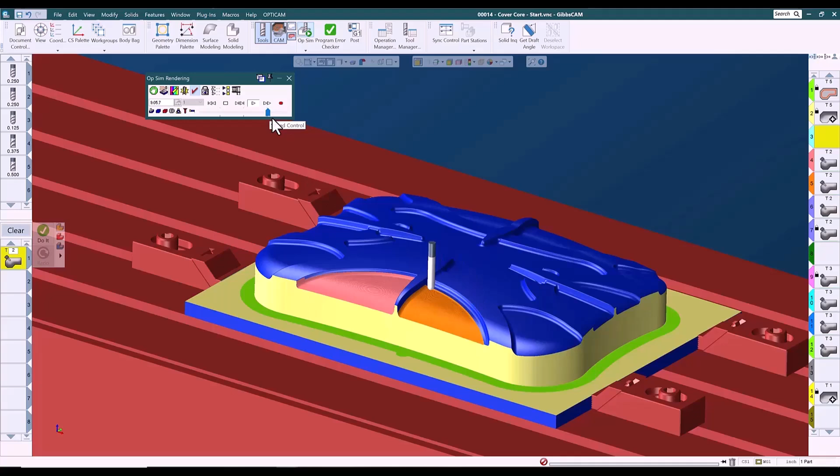There are three primary toolpath choices. The toolpaths are simple and straightforward and don't require a lot of input from the user. But in situations where they're appropriate, the surface processes are hard to beat as far as the simplicity of setting them up and the speed with which the toolpath is calculated.

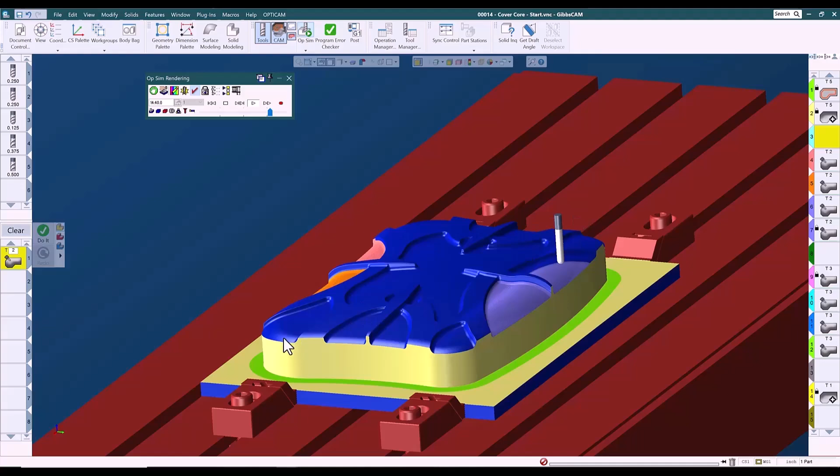Advanced 3D processes offer us more than a dozen additional toolpaths, most of which can be used for finishing. The advanced 3D toolpaths not only give us more toolpath types and patterns to work with, they give us significantly more control over the details of how those toolpaths behave.

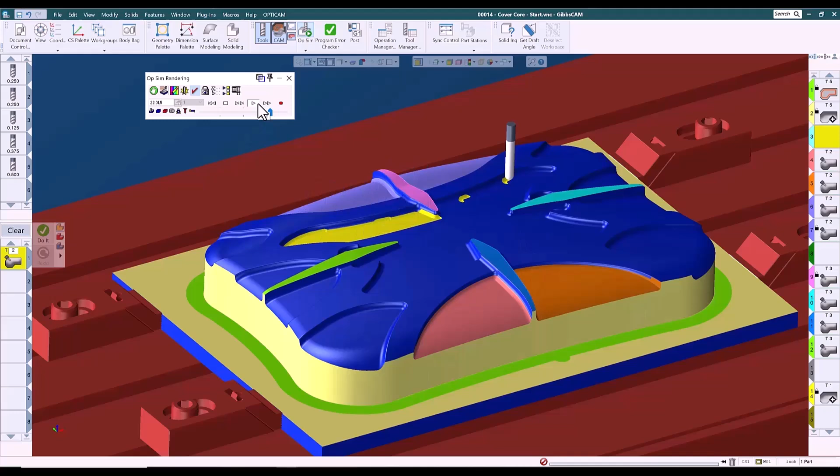5-axis or multi-axis process toolpaths offer us a vast array of additional toolpath styles and patterns, which, though marketed for 5-axis, can output 3, 4, or 5-axis toolpaths and provide options and controls to precisely control all aspects of the toolpath. Additionally, the multi-axis module provides the ability to calculate various toolpaths based on different underlying technologies, such as a triangle mesh, which is the strategy most widely used in the industry since the toolpath is a little simpler to calculate and it calculates a little more quickly. But toolpath can also be calculated based on the actual surfaces or based on a geodesic mesh, which tends to produce a smoother, more consistent toolpath.

In order to show you the things that I need to show you in a reasonable amount of time, and to keep this presentation at least a little bit more interesting, I've built the toolpaths on this part ahead of time. However, in the interest of transparency, especially for anyone who may not be familiar with the fluid drag and drop method in which toolpath is created in GibbsCAM, I want to take one of the more complex toolpath elements on this part and create toolpath absolutely from scratch. Let's machine this feature here.

And if I want to machine, I need a cutter. And I create a cutter simply by double-clicking on a tile on my tool list. I select the type of cutter. I'll take a ball mill, give it a diameter, 1/4 inch, make any adjustments I need to make to the length, and specify the number of flutes. I'll go with a 3 flute.

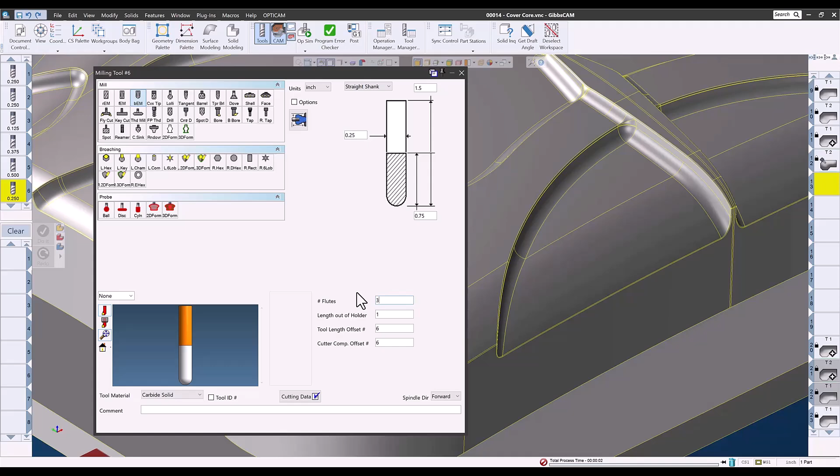Now the tools can be saved into a tool list, and I can load individual tools or an entire tool list with just a couple of mouse clicks. To create the toolpath, I take the tool and drag it down to my process dialog, or my process tile list, and then select the type of toolpath I want to create. I'm going to go with a 5-axis.

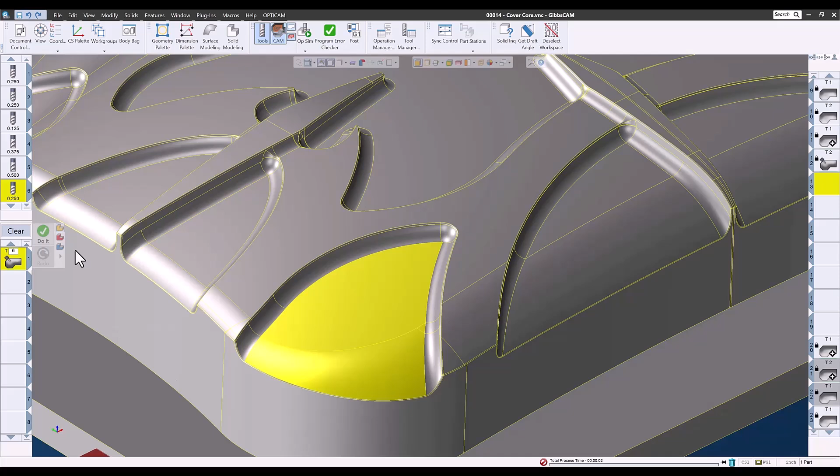And here I can restore defaults. I can go to my tool button and set my speeds and feeds that I've saved for this tool, and then go to the Surface Paths tab. On the Surface Paths tab, I'll select the type of toolpath I want to create. I'm going to create toolpath based on surfaces, and I'm going to select a parallel to curve or curves.

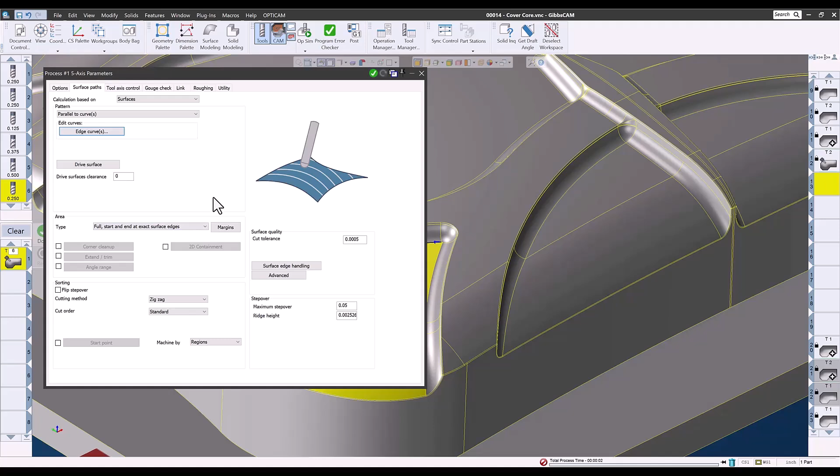I select the drive surfaces I want to machine, and my edge curves, the curves that I want the toolpath to be parallel to. I'm going to select these and click OK. And I'm going to adjust my step over to 20 thousandths and go to my tool axis control page and make sure that I'm outputting 3-axis toolpath. Once I have everything set the way that I want it, I hit Do It to create the toolpath.

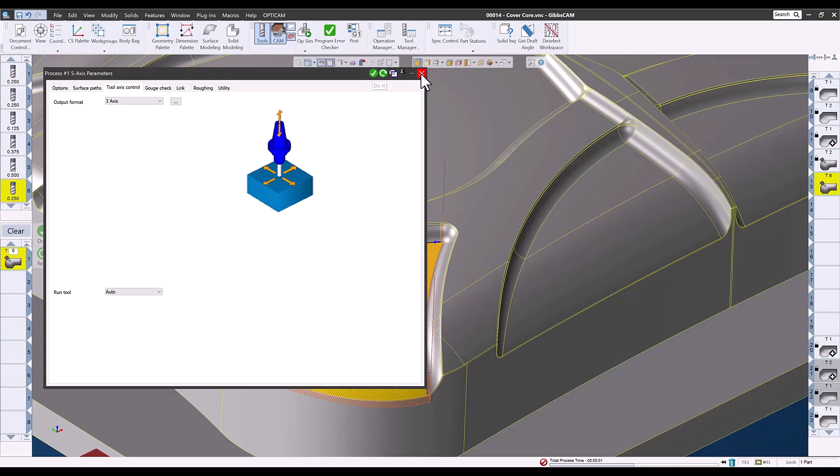Now if I want to create the same toolpath on other features, I could do that now. I can save this process if I like this and use it on other parts down the road, or I might want to machine multiple features with this same strategy. Maybe we want to machine this.

Load the process back up, go to Surface Paths, include that in our drive surface definition, and include this in our edge curves. Recalculate the toolpath, and we could do all of these pockets at one time.

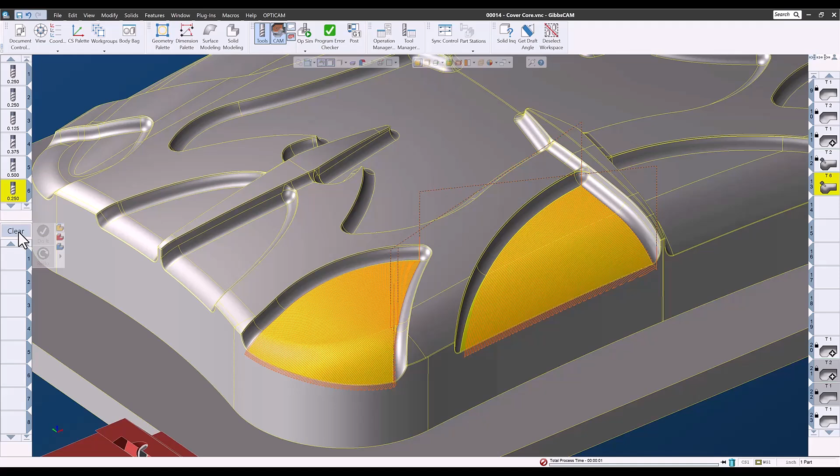At this point, I want to let you know that not all the toolpaths I'm going to show you are particularly good choices for the features that I have them machining. The point here is to show you that you don't have to settle when it comes to toolpath. You don't have to wish that you had more patterns to choose from.

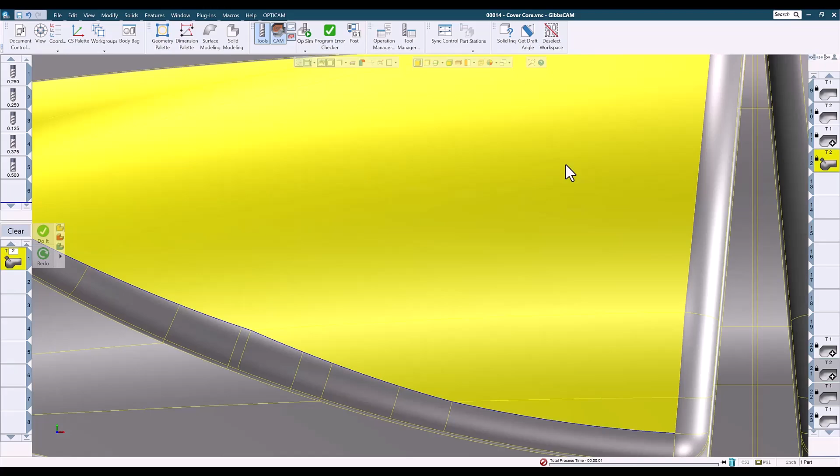GibbsCAM provides you with a wealth of toolpath patterns to choose from, with a huge variety of ways to define and control those toolpaths. Yet they're easy to set up and calculate quickly. They're easy to modify, and once perfected, can be saved for use on other projects. Let's take a look at some toolpath.

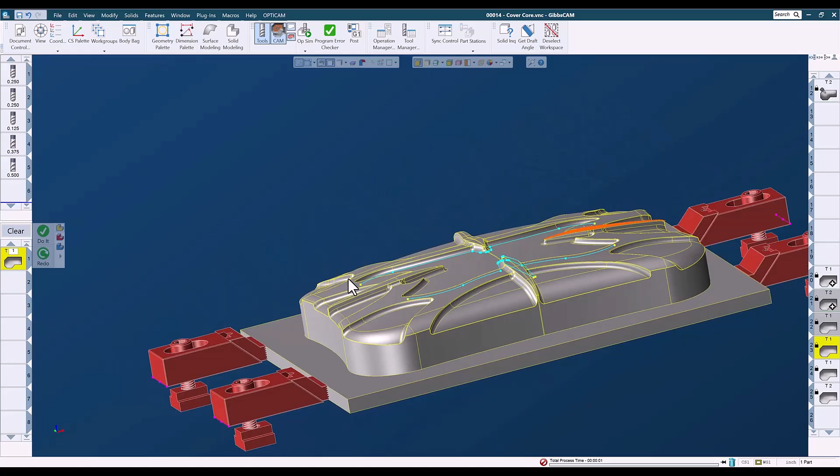Now, this part's not terribly complex, and in reality, you could machine most of this, if not all of it, with just some simple linear toolpaths, such as lace cut from the surface process. But more than likely, you'd want to machine different areas of this with different strategies, both to improve cycle times by minimizing retracts, as well as selecting toolpaths that better conform to the shape of the area being machined, both to even further reduce cycle time and to improve effective surface finishes.

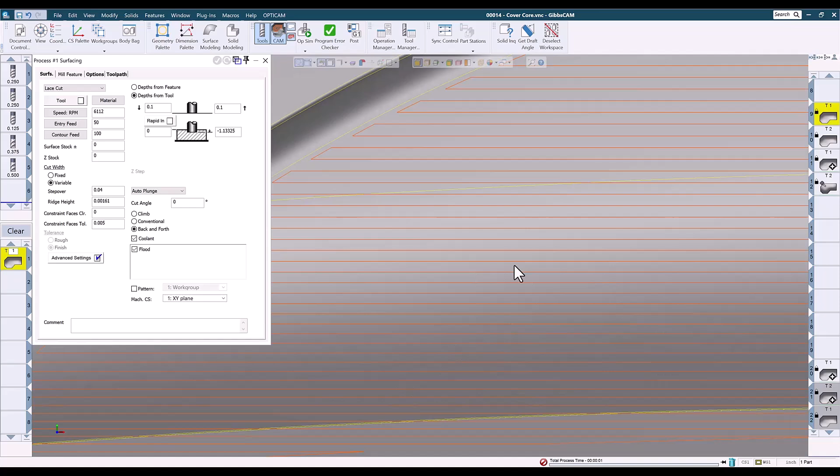This toolpath is from the surface process, and it's a simple surface lace cut toolpath. This creates a linear pattern at a designated angle to machine the selected face or faces. Lace cut is the surfacing toolpath with the most options and controls. It's also the only one that's designed to be used either for finishing or roughing. Lace cut is a true multi-face toolpath and can be set up very quickly.

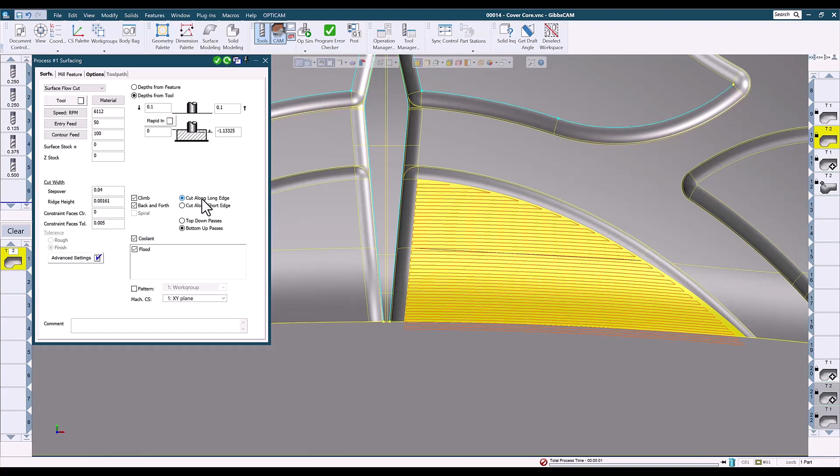This toolpath is also from the surface process, and it's a surface flow cut, which is a single surface toolpath that's controlled by the ISO curves of the surface. This toolpath will automatically run parallel to either the U curve, which would be considered the short side, or parallel to the V curve, which would be considered the long side. With a couple of exceptions, it's not ideal for multiple faces since it will machine each face separately, but it's often hard to beat when you need just a quick toolpath to finish a single surface quickly and easily.

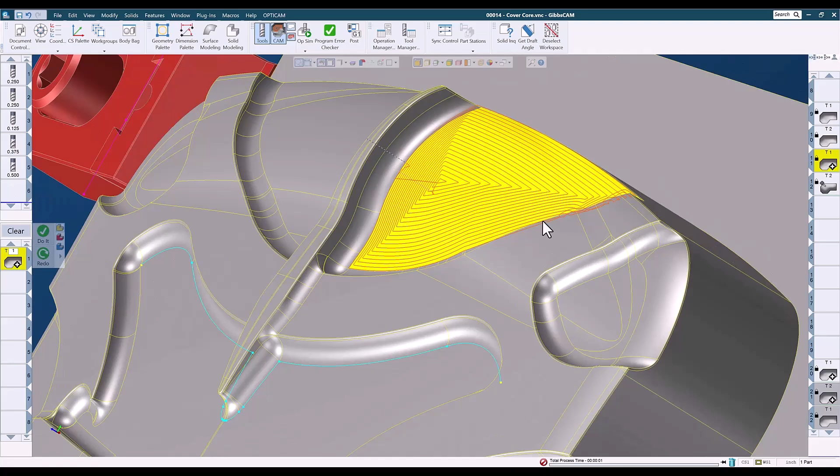On this toolpath, we're using the Advanced 3D Constant Step Over pattern. This toolpath is created by offsetting the boundary of the cut in a constant offset and maintaining the ridge height regardless of the surface angles.

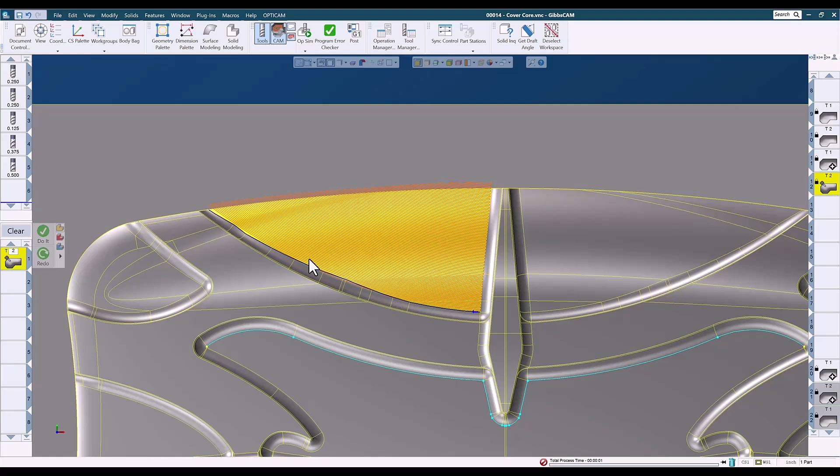This last one is from the multi-axis process, and the pattern is parallel to curve or curves. This toolpath allows us to select one or more faces that we want to machine and curves that the toolpath will then run parallel to. Let's take a look and see how those look running.

So we have the front two running different variations of a straight linear toolpath, and the back right an offset of the boundary of the faces. And then this one is running parallel to, in this case, just a single edge.

Let's take a minute to focus on the center section now. This is an example of an area where the simple surface lace cut really isn't very well suited, and why it's important to have a very broad suite of toolpath choices at your fingertips.

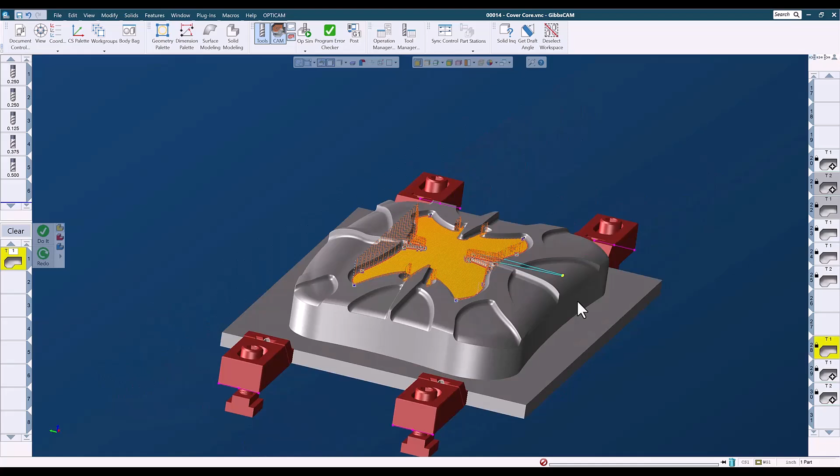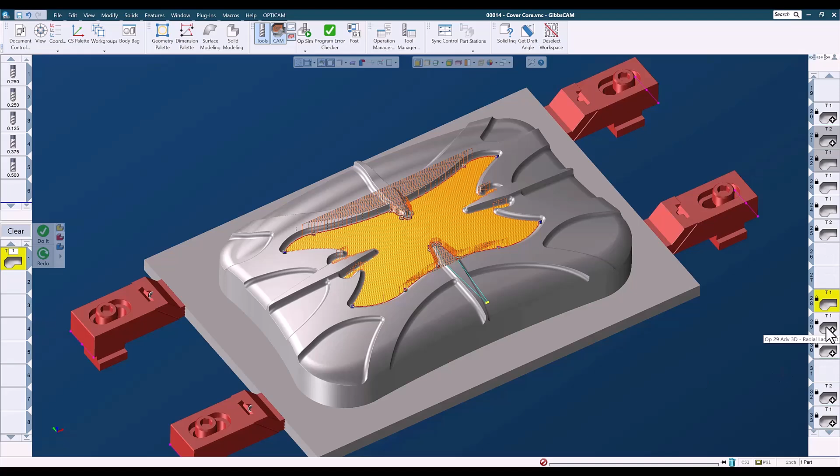This toolpath is doing exactly what we asked, but due to the irregularities of the shape, this toolpath has to retract frequently to jump over areas that aren't part of the cut, but that are in line with the linear strokes of the toolpath. So while a linear lace cut is entirely appropriate for this toolpath, it's not one that we would choose for this toolpath. Let's look at a few toolpath choices that might do a better job for us on this.

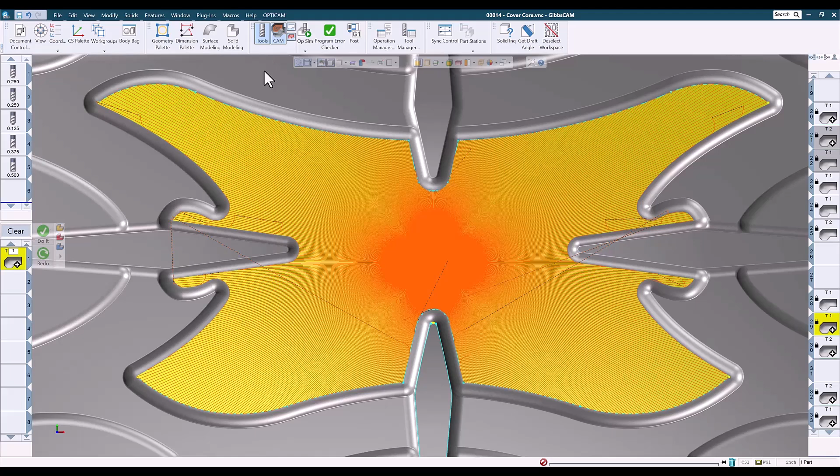Now this one's an interesting option. This is an advanced 3D lace cut using the radial mode, which works in a fan shape from a defined center point. Since almost the entire feature here can be reached in unbroken lines from the center of the pocket, this toolpath works, and works quite well.

However, since in this case the center point is located within the area being machined, the toolpath gets really dense toward the center point. So we end up with most of our toolpath with a much finer step over than what we specified, meaning the toolpath has more length. There's more toolpath required to finish this area.

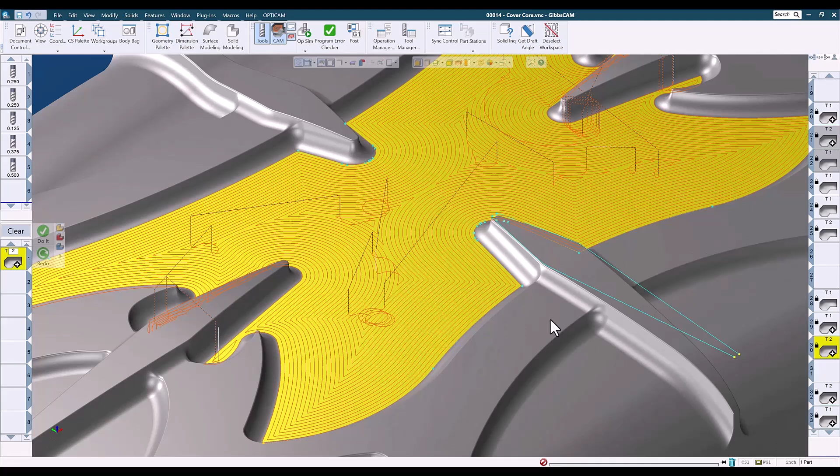Now, using an advanced 3D constant step over toolpath, we achieve some very good toolpath. This one has a few retracts due to the way that offsetting of the boundary creates isolated areas as the offsets get separated from the rest of the shape. But this toolpath does a good job of following the shape of the area being cut. And with a finer step over, this would produce a very good finish in this area. This toolpath is less than a third of the length of the radial lace cut that we just looked at.

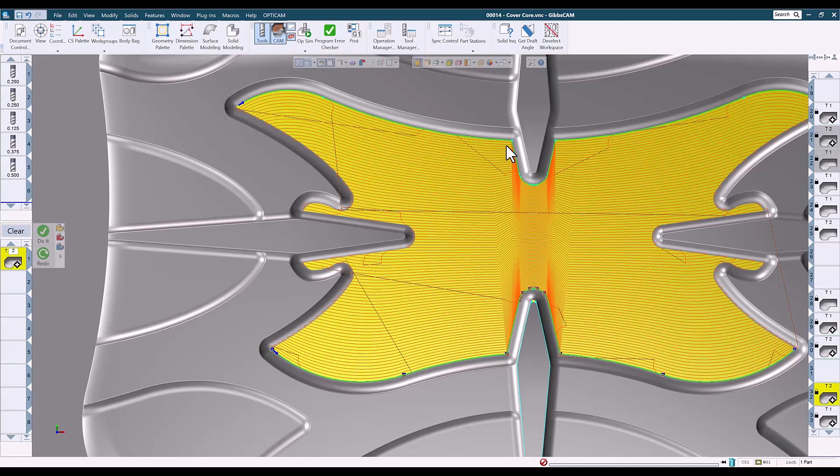Here's an advanced 3D 2-curve flow, where the toolpath is morphing from the upper shape to the lower shape as it crosses the cut area. Now this is a very usable option and is getting close to what I would be looking for. But with this shape, as the drive curves change direction and head more toward the opposite drive curve, the toolpath gets really dense, which is less efficient and really not what I'm looking for. But this one only misses the constant step over by about 35 seconds in runtime. So it's still pretty efficient.

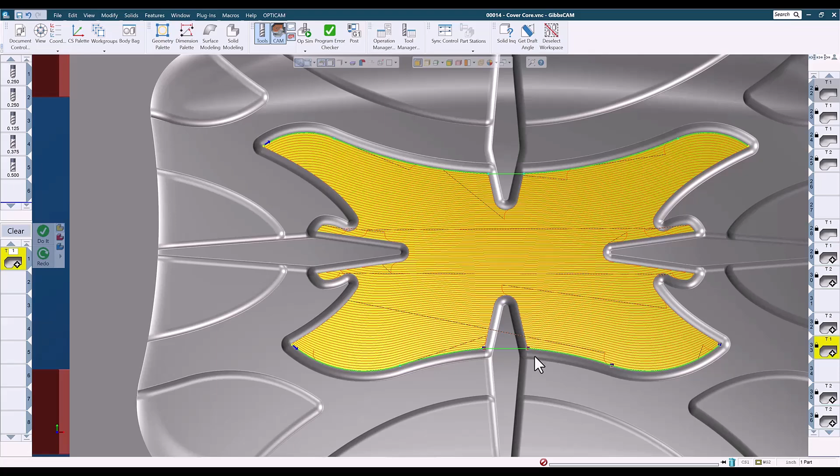But if we stick with the 2-curve flow but slightly modify the drive curves, we can get this instead. This choice has the fewest retracts and is the fastest running of any of these choices.

Now I do want to point out that there's nothing wrong with what I used to call playing what-if games. You can try multiple toolpath options in different areas very quickly and easily and kind of see what the effect is on your runtime. I used to do that frequently when I programmed every day.

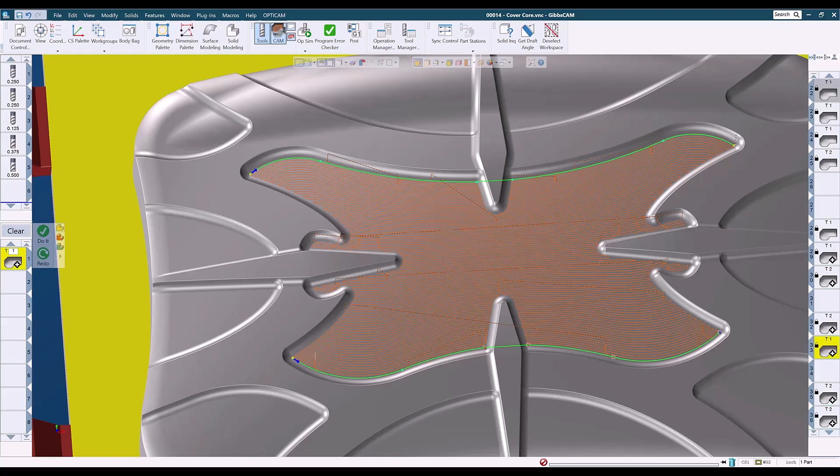Moving on to some of the other features, this is an advanced 3D spiral lace cut. By defining the center of this arc as the center of the spiral, limiting the tool to the silhouette of the surfaces, and running the tool back and forth, we get a really nice toolpath that somewhat flows with the shape and has minimal retracts.

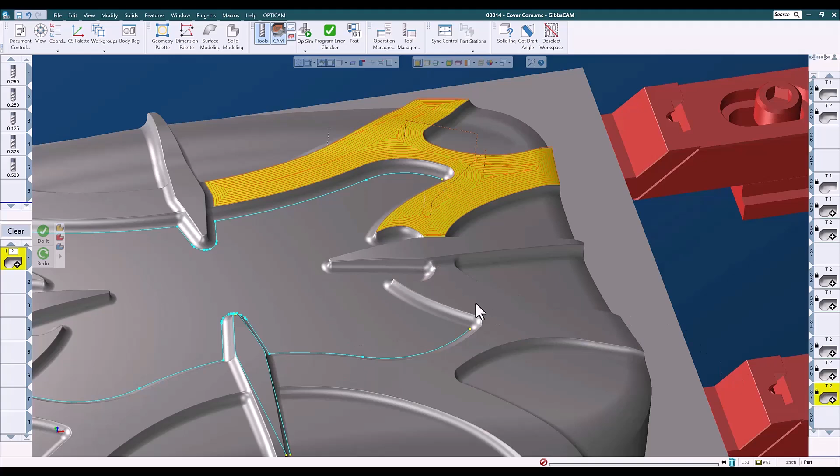Here's an advanced 3D constant step over pattern. This flows perfectly with the area to be cut and only has 2 retracts. This would work very nicely for this shape. And while we're looking at these, let's check out a few of the multi-axis or the 5-axis options for these features. Of course, all of these are set to output 3-axis toolpaths.

This is a multi-axis toolpath based on surfaces, and the pattern is a morph between 2 curves. This is a beautiful toolpath that morphs from one edge to the opposite edge and gives me complete control over retracts.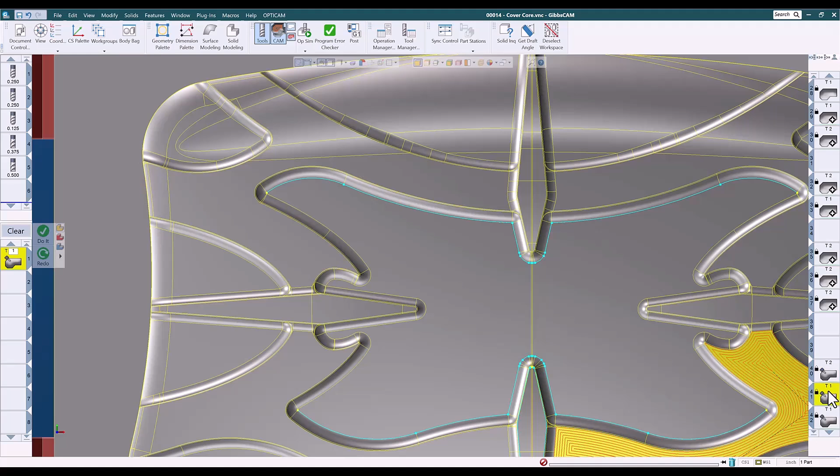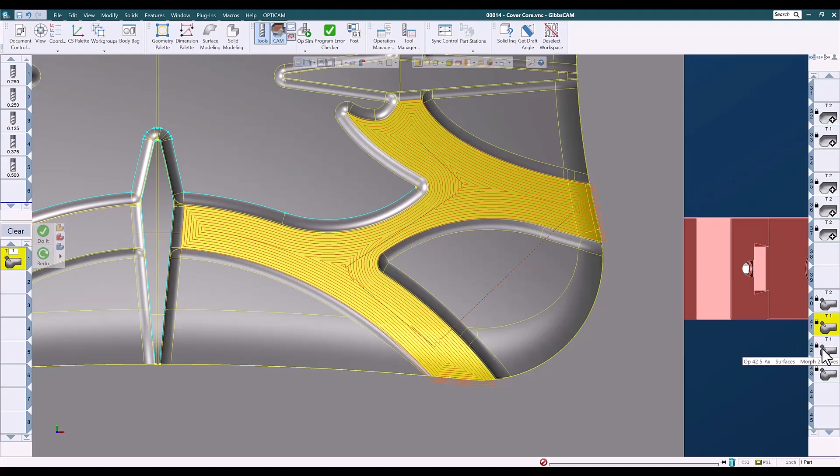This is a multi-axis in geodesic mode, and the pattern is parallel to multiple curves with automatic detection of curves and default settings. So with automatic detection of curves, I don't have to define the curves. It selects them based on the surfaces being cut. This is going to be very similar, in this case, to a constant stepover from the advanced 3D, but probably with a little bit better retract control.

And this was just another multi-axis morphing toolpath. And then we get to this one. This is the multi-axis toolpath geodesic, based on a geodesic mesh. And it's using the morph between 2 curves pattern. It's similar to the other morph between 2 curves, but this is the geodesic version. This produces an incredibly nice toolpath for this shape that has no retracts and conforms to the area very well. This would probably be my choice for this area.

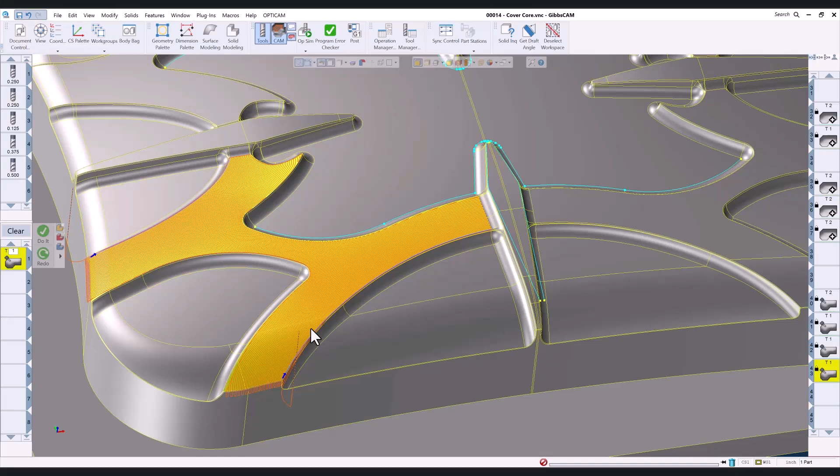Let's see what some of the toolpaths that I said I preferred look like in place with more realistic stepovers. My preferences are largely driven by a desire for few, if any, retracts, and a toolpath that, to my mind, flows with the major curves of the shape being cut.

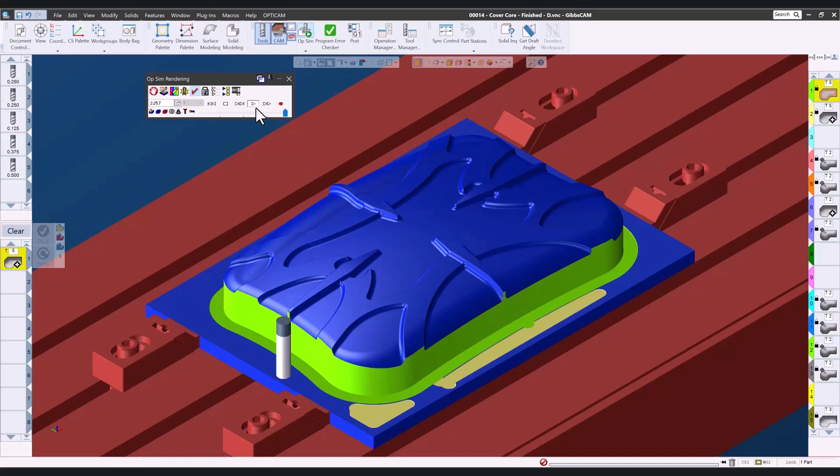I started out finishing the outside vertical walls of the core with just a basic contour with Z-ramp turned on so it ramps down, and then following that up with an advanced 3D flats cut on the flange. Notice that the flats cut is avoiding the fixtures. This is a setting in the dialog, and you can specify how much distance there will be between the cutter and any fixture.

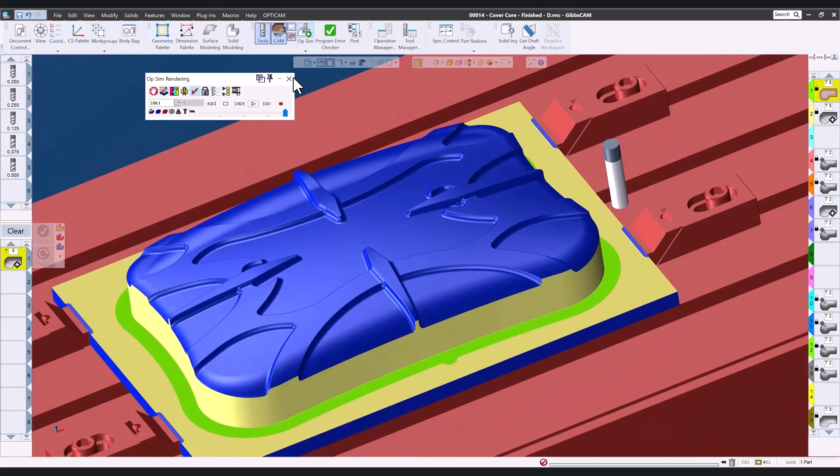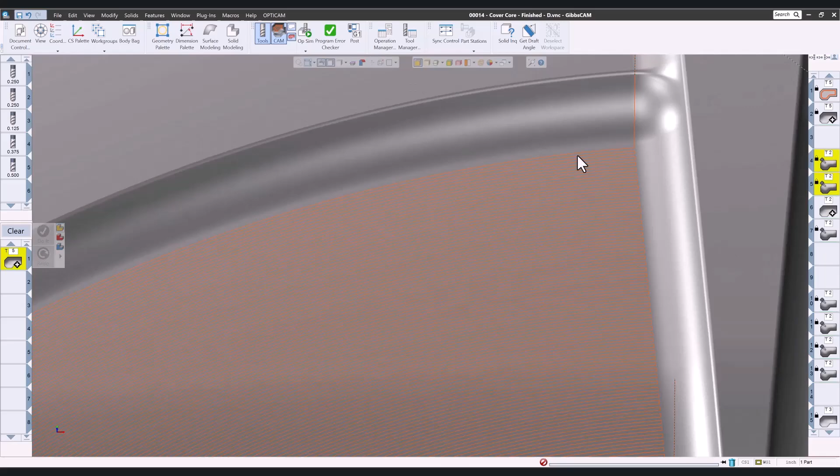Looking at the pocket on the front and on the back side, I started out with a multi-axis based on surfaces and selected a parallel to curves for the 2 pockets in the front. The difference is for the first pocket, I only selected the back radius as the edge curve, and the toolpath looks like this. For the other pocket on the front, I simply added the side curve to the edge curve definition, and as a result, the toolpath starts here rather than over here and works toward both these walls at the same time.

We'll take a look at those 2 running. You can see that this toolpath is running parallel to only the back curve, while this one is running parallel to both the back curve and the side curve.

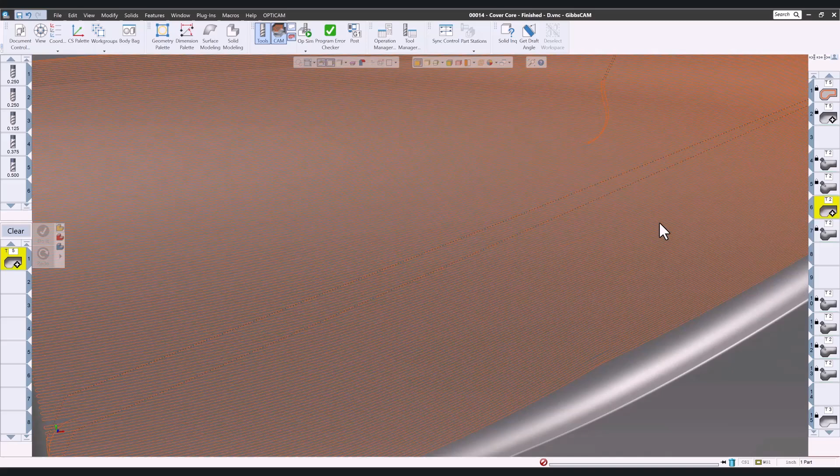For this one on the back side, I chose an advanced 3D curve flow. I extracted edges from the model and adjusted them slightly and ended up with this. This looks good, except to me the toolpath gets a little too dense for my taste over in this area. Now we could modify the curves and get most of that out, but just taking one shot at this is what I ended up with.

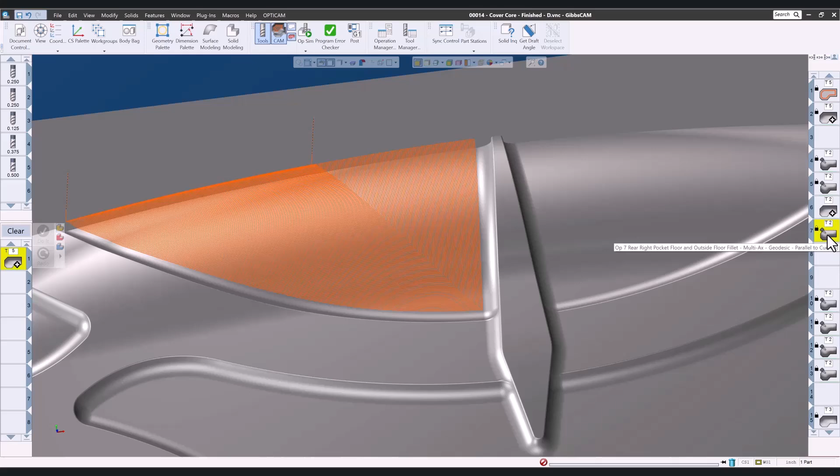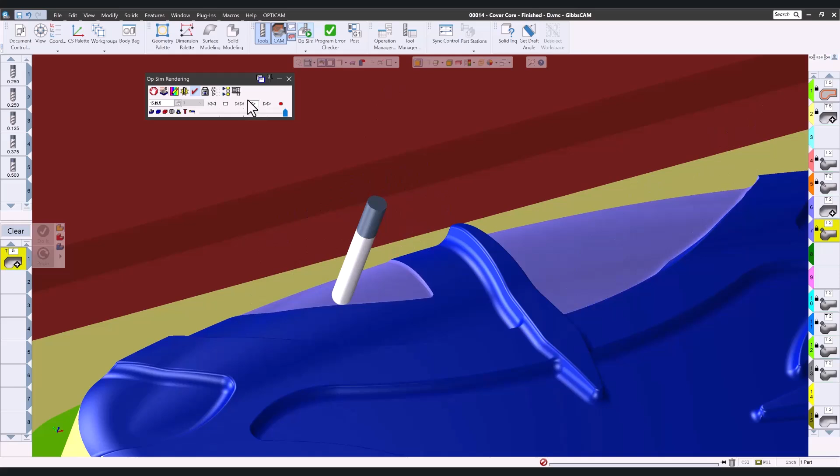For the one on the back right, I selected the parallel to curves based on a geodesic mesh. The same logic as the first 2, but based on a geodesic mesh rather than surfaces. You can see how smooth and consistent this toolpath is. And let's see those 2 running. This one is running nicely, but you can see that every stroke goes to that back right corner, making the toolpath much more dense in that area, while this one is conforming to the closed sides of the pocket and every stepover is consistent.

All right, for these H-shaped bosses, I selected morph between 2 curves for all 4 of these, but for the front 2, I used the option from the multi-axis geodesic toolpath. You can see there are few, if any, retracts. And for the back two, I used the option from the multi-axis surface-based toolpaths. These have a few extra retracts, but most of those could be tuned out with a few seconds on the linking tab. But I'm showing the toolpath with largely the default settings.

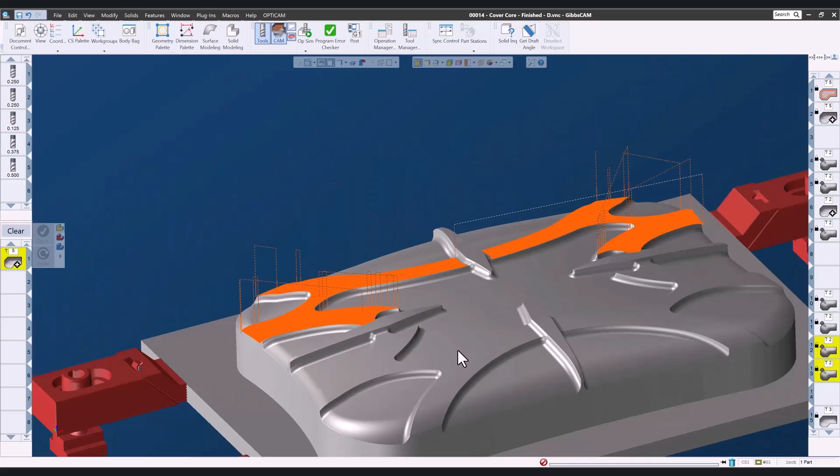And this is what they look like running. Each of these toolpaths is morphing from the long side to the short side, the geodesic toolpaths in the front and the surface-based toolpaths in the back. The geodesic patterns do make a cut to the outside of the short side before finishing so that the tool is climb milling at that edge rather than pushing the chip or burr to the outside.

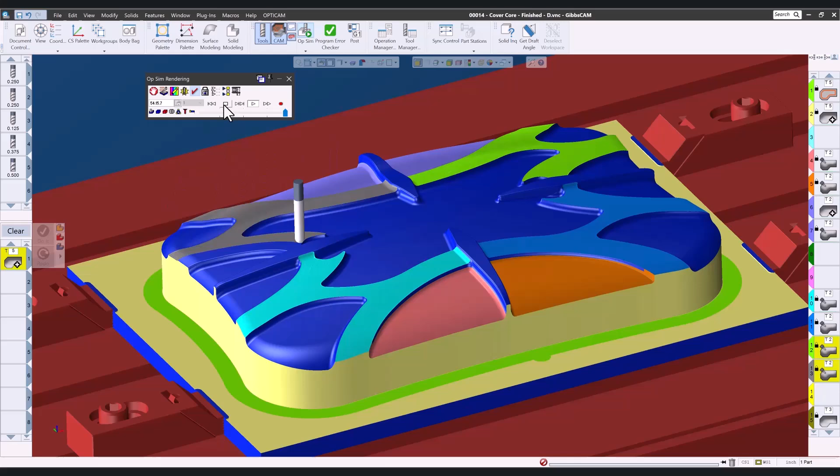And in the back, you see that functionally a very similar toolpath is produced by the calculations based on surfaces with the morph between two curves pattern. And with either, by setting appropriate cutting tolerances and stepovers, fitting arcs where appropriate, you can easily achieve the surface finishes your customers are looking for or produce a part that requires minimal polishing if that's the finish that you need.

Moving on, for the 4 diamond-shaped bosses, I used a 2-curve flow from the multi-surface process for this one.

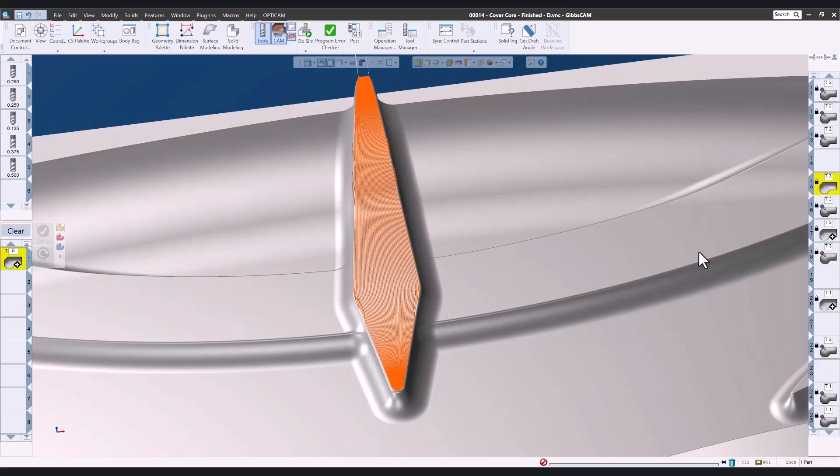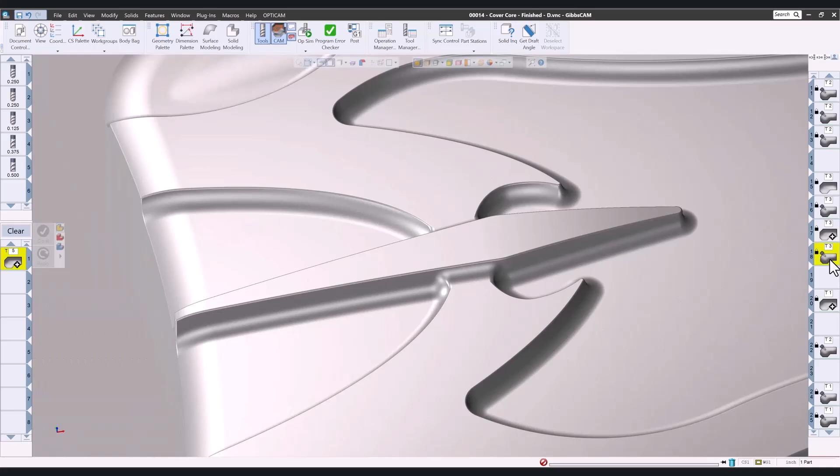I used a multi-axis based on surfaces morphed between 2 curves for this one. I used an advanced 3D 2-curve flow for this one. And back to the multi-axis option for a geodesic-based morph between 2 curves for this one.

You can see that all these options produce similar toolpath, but with varying numbers of retracts, although none of them have more than just a small handful. But they all start with one shape at one edge and morph as they move across the surface to the other edge.

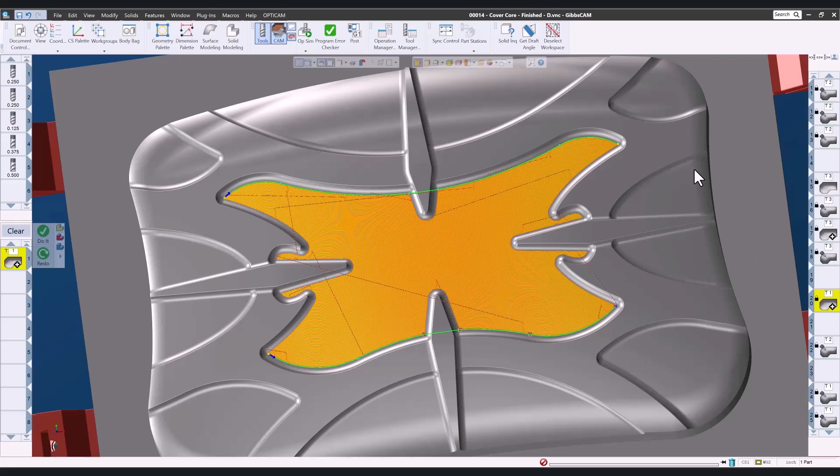For this center section, I went back with the advanced 3D 2-curve flow using that modified geometry. And then for the 8 pockets on the ends, I used the parallel to curve from the multi-axis toolpath based on surfaces toolpaths.

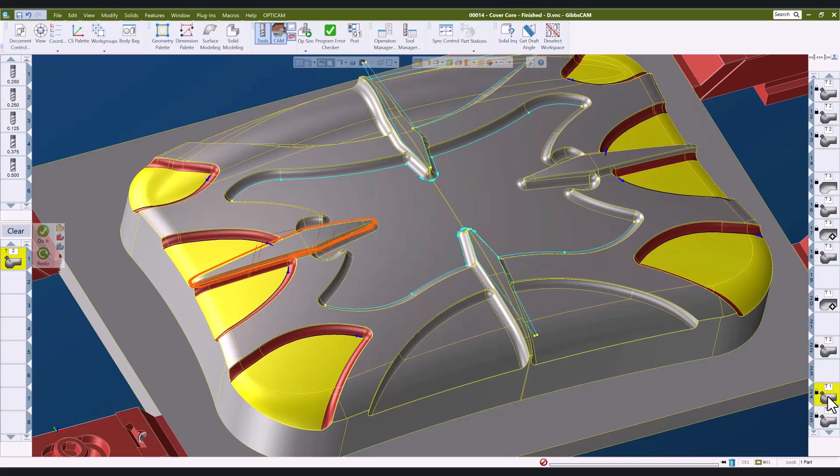And then I came back and added some toolpath for the blends on top of the bosses. Added toolpath to finish the floor-to-wall fillets. And if I hadn't finished these with the floors, I would come back and take care of these fillets. Now let's quickly run through the rest of this toolpath graphically.

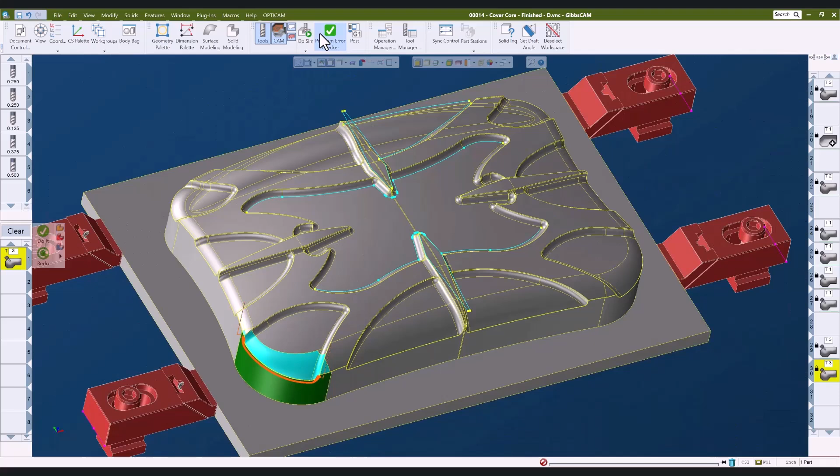For this sample toolpath, we've used patterns from all 3 of the 3D modules: surface processes, advanced 3D processes, and multi-axis processes. Hopefully, I'm demonstrating that there are a huge number of toolpath choices in GibbsCAM for 3D finishing, and usually far more than one way to approach creating toolpath in a particular situation. Yet, these toolpaths are simple to set up, quick to calculate, and have the power to machine your parts your way.

Now, once we've developed toolpaths, especially if they're well suited to the parts we commonly manufacture, it can be really helpful to save the processes. Let me load this one up again. This is an advanced 3D N-Curve flow using a 1/4-inch ball mill and with a step over of 20 thousandths.

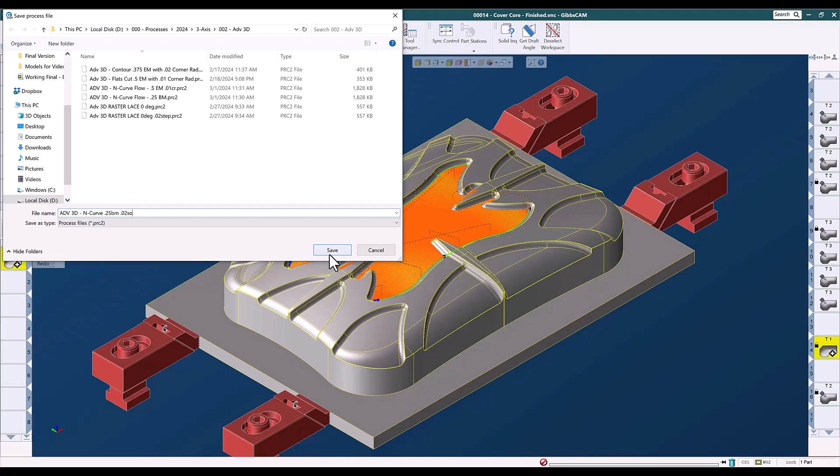If I think this did a really good job on this part, and I'm likely to use this strategy with the same tool on something else, I might want to save the process. Then I can call it up anytime I need it with just a couple of mouse clicks. I can simply right-click on the process, and this could be a multi-process for that matter, and save it to a folder and assign it a name that will allow me to know where to find it and know what it's going to do.

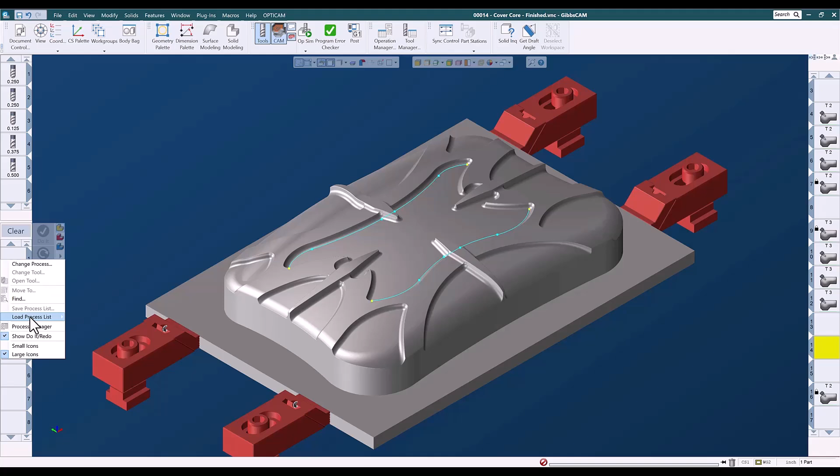If down the road I run into a situation where I think using an advanced 3D N-Curve flow toolpath with a 1/4-inch ball mill will help me, I simply right-click on a process tile, hover over Load Process List, and navigate to the process I want to use. I'll grab this 001 Advanced 3D N-Curve 1/4 inch ball mill with a 20 thousandths step over.

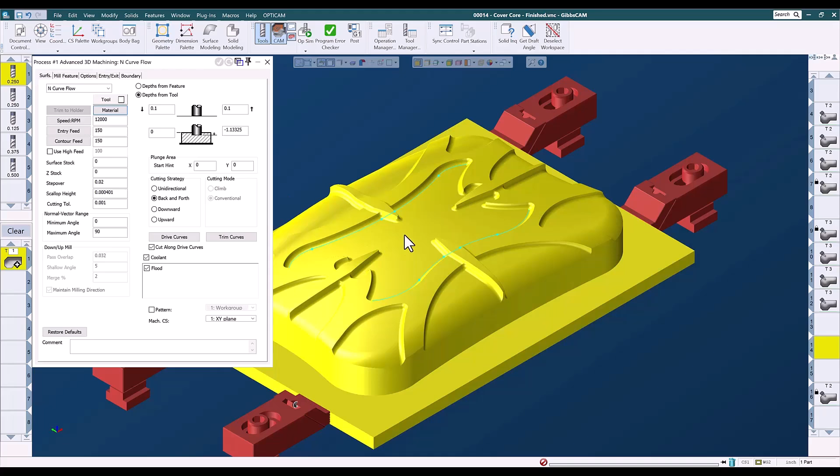I'll open up the process and select the surfaces that I want to machine. And then I'll define the drive curves that I want the toolpath to run parallel to. And then hit Do It.

These saved processes capture the settings for the tool use, speeds and feeds, depth of cut, really all the information about the toolpath except specifically what to cut. And if the tool is not already in your tool list, the process will build it automatically. Over time, saving and utilizing these processes can really streamline your programming, as well as standardizing many of your processes to provide a greater degree of consistency from one job to the next, or for that matter, from one programmer to the next.

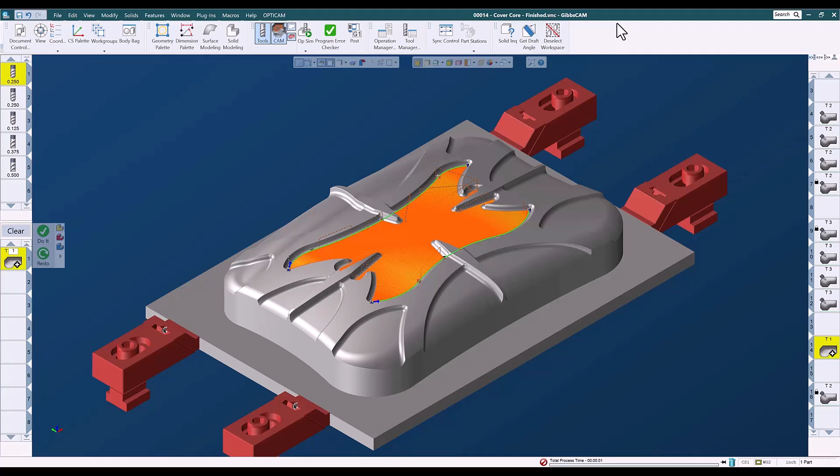I'd like you to see what using saved processes is like, so I'll program this part complete using saved processes. Here's the part that I had in my spare parts library, I call it. It's a 3D part. It is about 14 and a half inches long and 8 inches wide, a couple of inches thick. And the first thing that I like to do when I open up a model that I'm not terribly familiar with is to check it out a little bit.

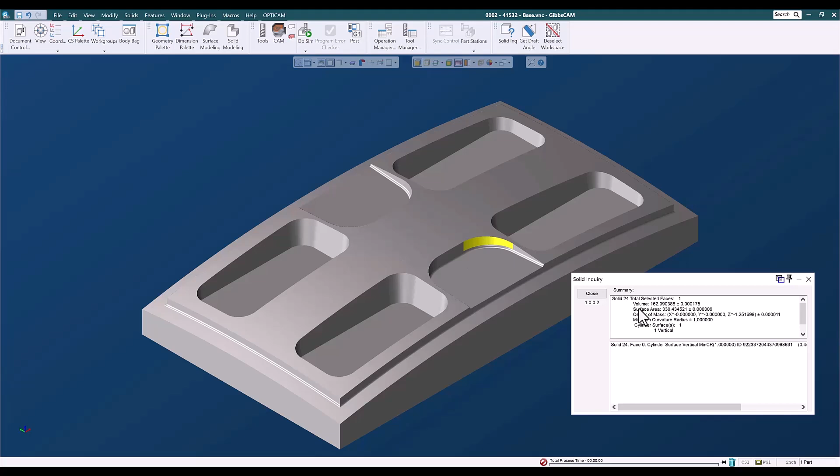And close that too soon. And I also usually check a few radiuses just to see what I'm dealing with. These are 1-inch radiuses, and these are .504 and some change radiuses.

All right, so I'm ready to start machining this. I'm going to open up my cutting tools and my CAM, and I'm going to load a tool list in here. So I'm going to right click, go to load tools, and load my 3D finishing tools. All right, so the first thing that I want to do is rough this.

So I'm going to right click, go to load process, 3-axis roughing, and load a VoluMill 3D toolpath using a 1/2 inch rougher with a .040 step up. The step up in VoluMill is what gives us definition to our 3D shape. It'll cut to the set depth per cut, but then when it hits the 3D surface, it'll just walk up that surface. It'll take passes higher and higher to give you a much closer to net shape cut.

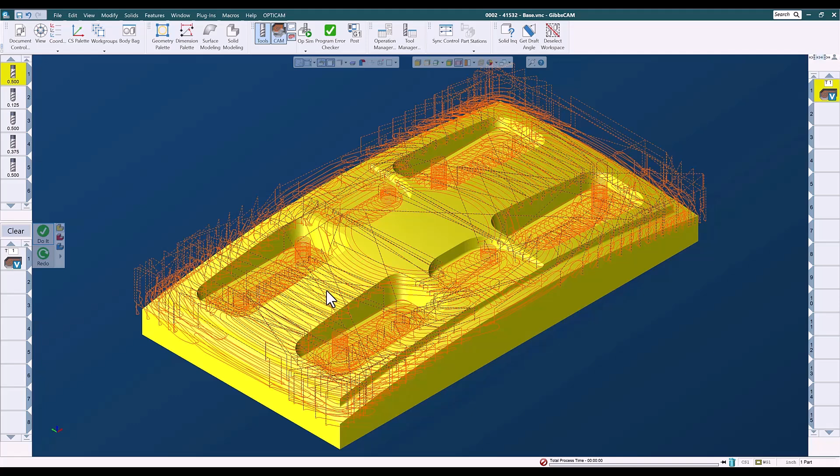All right, and there we go. You can see it's putting as much definition to the 3D shape as it can within the bounds of the .030 step-ups that I specified. All right, so I'm going to clear this out and decide what I want to do next. I think the next thing I'm going to deal with is going to be the 7.5 degree walls on these 4 pockets.

There are a few ways that I could approach that. The main thing that I want is minimal retracts, minimal times the tool pulls off the finished surface. So I want to start cutting this edge here and finish cutting this edge, but with a spiral down. So my passes are going to be closer together on the short side than on the long side. But let's see what we got.

So I'm going to right click, go to load process list, 3-axis, and I want to go to my 5-axis engine again and go to surfaces, and I'm going to select this morph between two surfaces rather than the two curves. We looked at the two curves earlier. Let's look at a morph between two surfaces. We'll open that up and look at our Surface Paths tab.

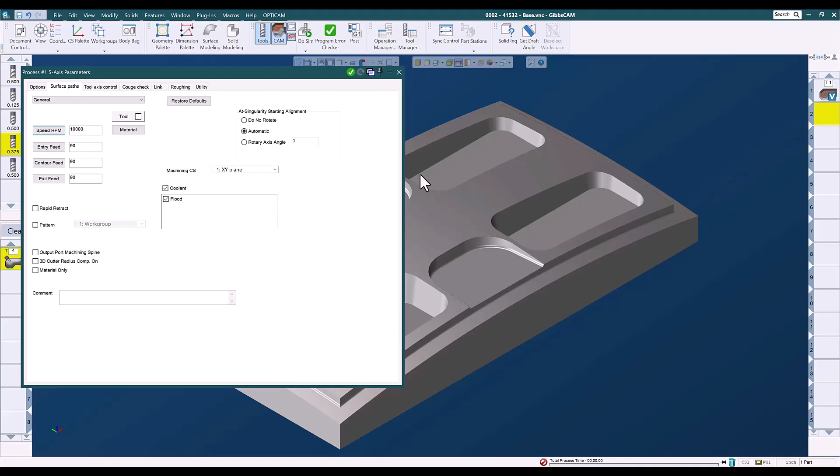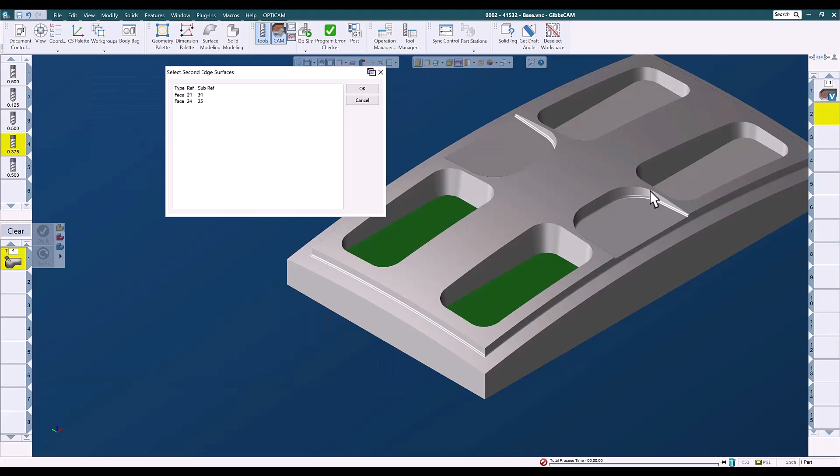And we need to define our drive surfaces. So I'm just going to run around and grab these real quick. And then I'm going to do my edge surfaces. My first is where the toolpath is going to begin, which will be here. So my toolpath is going to begin at the intersection of this blue surface, my first edge surface, and the yellow. The yellow is what's being machined. And then the second edge surface is where my toolpath is going to end. And it's going to be the floors of these pockets.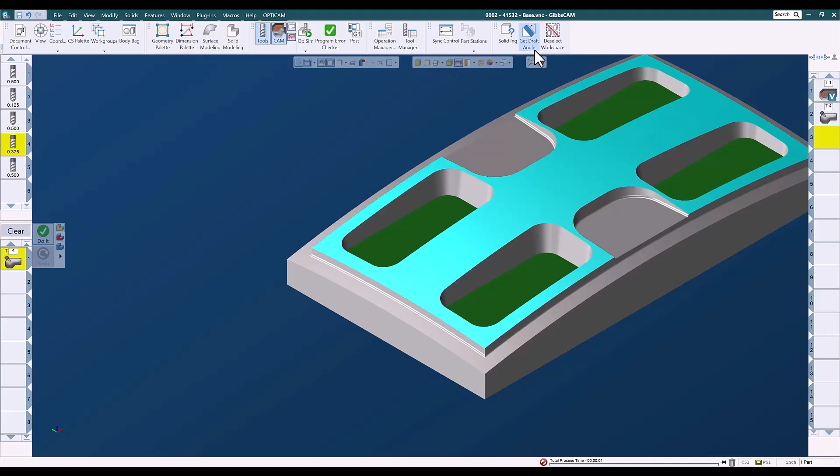And then we'll say do it. And there's that toolpath. I'm fairly pleased with that. Blank area of the screen, and let's deselect and decide what we want to do next. I think that I will machine the flats next. That is definitely going to only be these floors here. But a part of many of my 3D parts is a flats cut, which automatically finds any flat horizontal surfaces and finishes them.

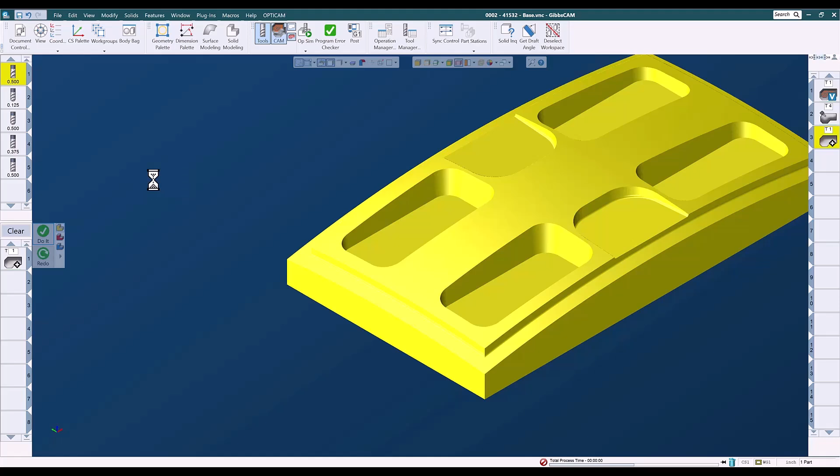So we're going to load processes. I'm going to go to Advanced 3D and grab this flats cut that uses a 1/2 inch end mill with a .010 corner radius. I'll select the entire part and do it. And that looks pretty good. All right, let's move on.

What would I like to do next? I guess we could deal with these features here. I'll machine the walls and the floors here. So there are a number of ways that we could approach these walls. These are vertical. So we could do a contour, just a plain Jane geometric contour projecting the toolpath down onto this surface. But there's a better way if we have the 5-axis module available.

So I'm going to right click and I'm going to go to load process, and we're going to go to the 5-axis and a swarf cut with an 1/8 inch ball mill. All right, I'm going to go to my Surface Paths tab and define my swarf surfaces, which are going to be these.

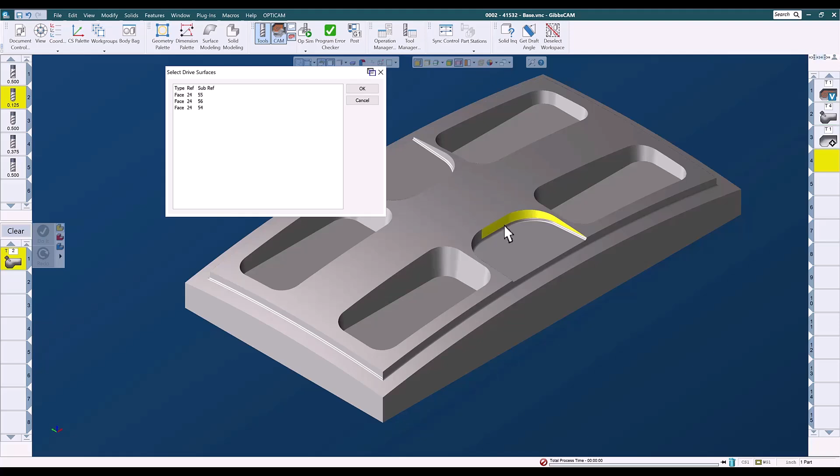And then get these over on this side as well. And those will be the swarf surfaces, the surfaces that we're actually cutting with the edge of the cutting tool. All right, and then I'm going to go ahead and define floor surfaces as well as those. And I will hit do it. And there's that toolpath.

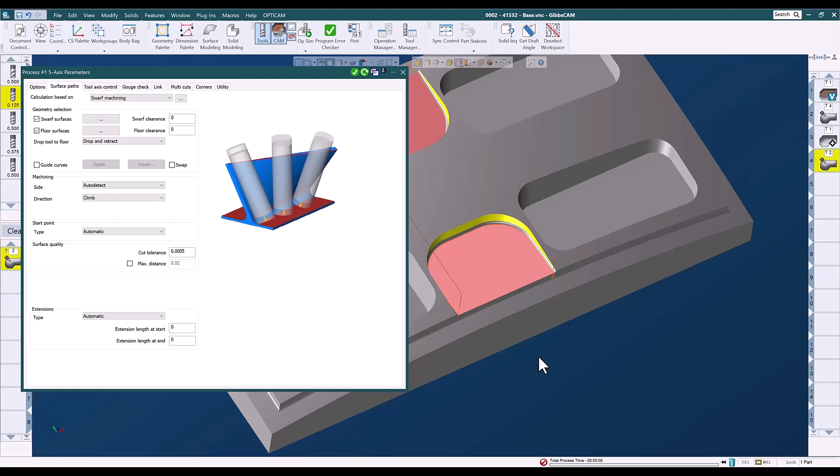All right, continuing on. Now I guess I need to finish the floors. I'll do this surface here. Let me clear this out, right click. I think for this, I'm probably just going to do a basic lace cut. Well, I guess I'll do an advanced 3D lace cut. So I'm going to load process, 3-axis, advanced 3D, and grab a raster lace cut at 0 degrees.

So on this side, at 0 degrees, the raster lace cut is going to start on the front and work its way to the back. So I'm going to do these separately because I want both of them to work from the outside in. If I did both of these at once, this one would work from the outside in, this one would work from the inside out, because the direction of offset is going to be toward the rear. So let's go ahead and do that one.

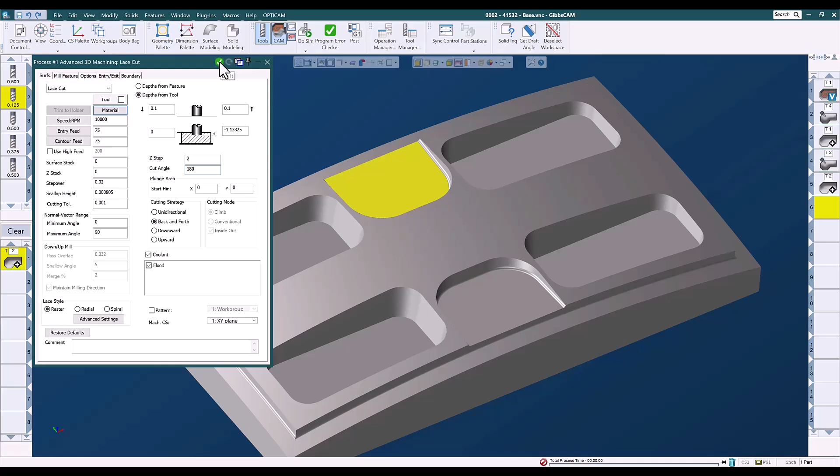And that looks pretty good. We'll click on a blank tile. I'm going to click back here. And the only thing I have to do to machine that one is open this back up and change my cut angle from 0 to 180 degrees. Now it'll start on the back and work its way toward the front. And that looks good to me.

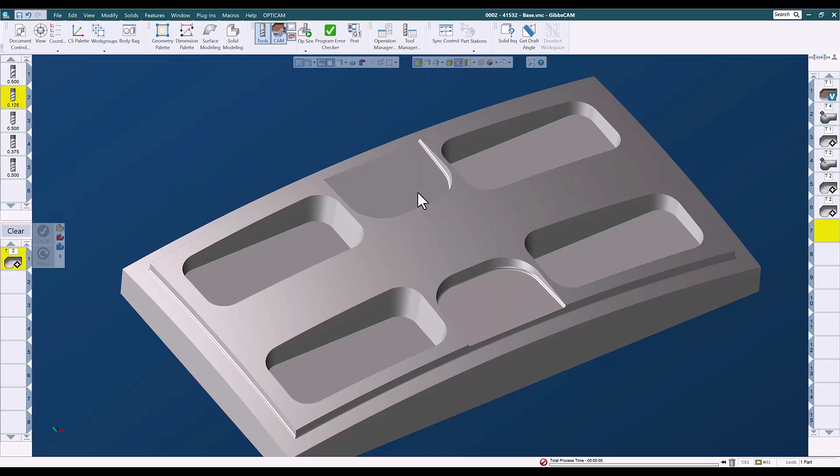So we finished the 4 pockets. We have finished the 2 pockets. We've roughed it. So I think next we will deal with the top surface here. Let's find something for that. I'm thinking probably a geodesic, maybe offset from multiple curves, and it should be able to pick those up automatically. So let's right click, and I'm pretty sure I've got one of those. So we're going to go to 5-axis, geodesic, and parallel to multiple curves, automatic with a, that's 1/2 inch end mill. That's not going to work. Let's go with a 1/2 inch ball mill.

And then I want to open this up, and 50 thousandths is fine for a step over. Let's see. I think all the rest of that is good. And I'm going to hit do it. All right, and that looks good to me. We might could come back and try to work some of these retracts out, but it is moving a fair distance, so it probably does need to retract.

And this is going to be similar to what we talked about on the constant step over cut. The way that the borders of this shape are being offset, you will end up, especially with a shape like this, with areas where the toolpath gets isolated, and so it has to retract to reposition to a new area.

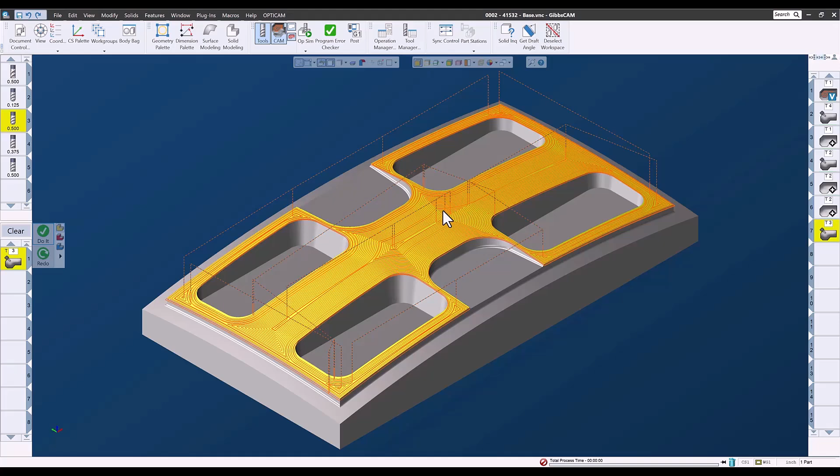All right, so I think the last thing we have is this collar here. So let's select a process for that. I'm going to go back to the 5-axis, and we'll try geodesic, and I'm going to go 1/8 inch ball mill parallel to multiple curves, and this gives me the option of selecting the curve. So we'll try that as something a little bit different.

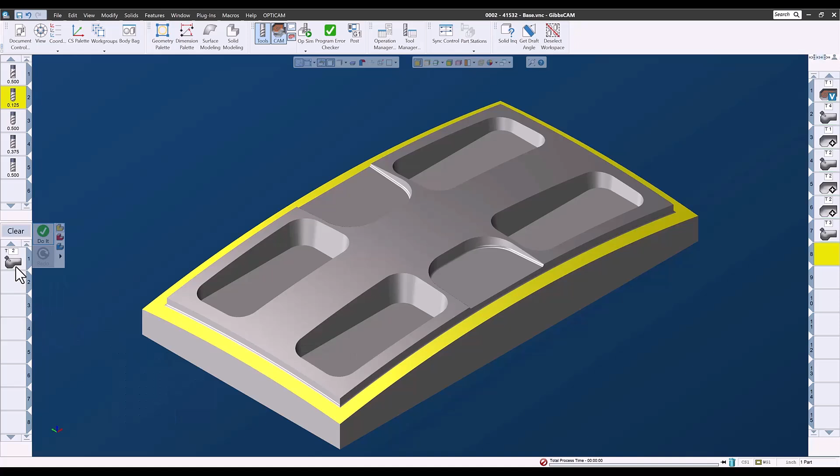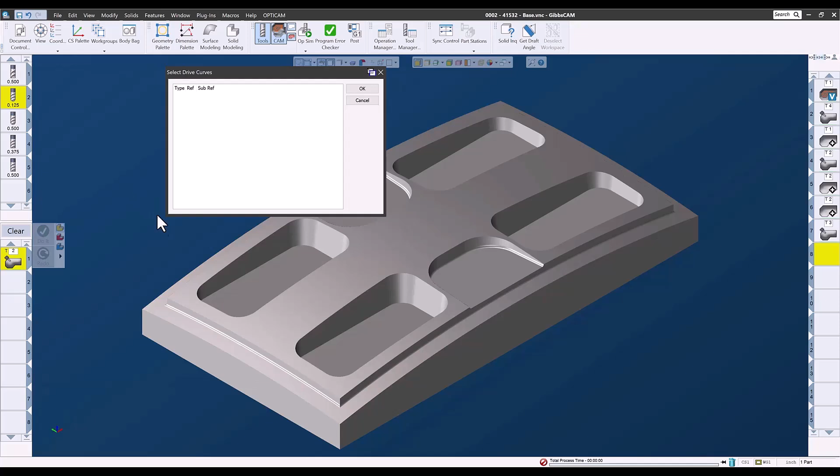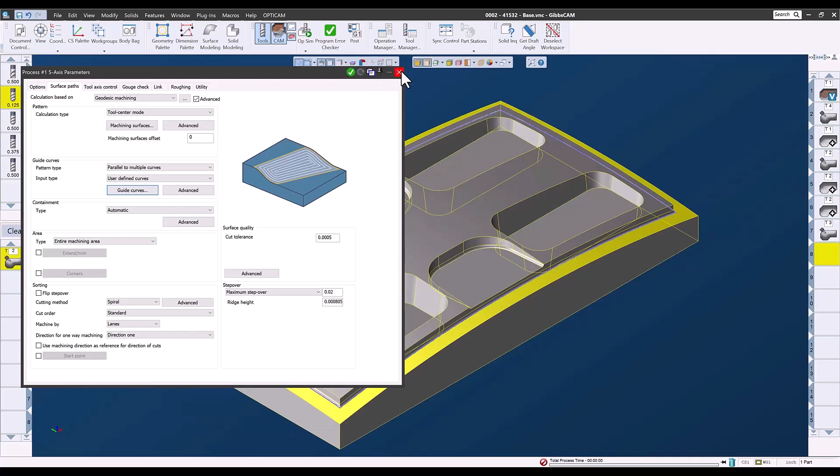All right, so we'll open this up, go to the Surface Paths tab, and define our machining surfaces as that one surface there. It's already set to parallel to multiple curves, user-defined curves. I'm going to go to my guide curves, turn on my edges, and I'll zoom in a little bit because my eyes are not all that good. I'm going to select these edges here as the edges that we want the toolpath to run parallel to. And let's say do it. And there's that toolpath. That calculated real fast.

All right, let's see what that looks like. If we start from a rectangular block and let this toolpath do its thing.

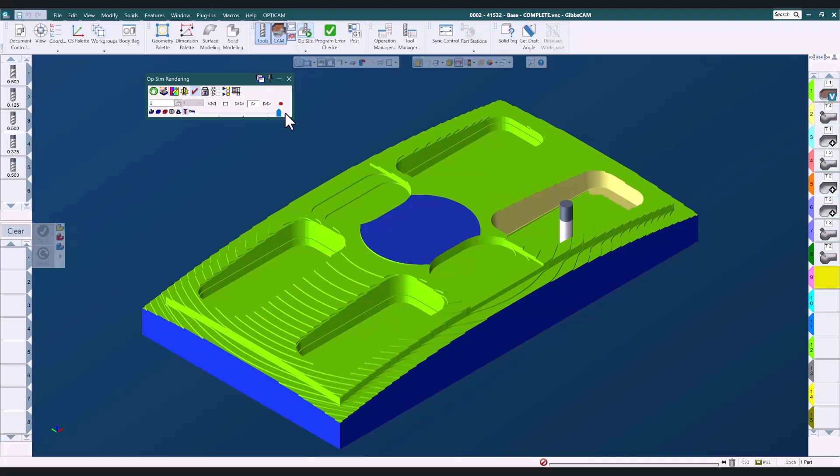Well, hopefully I've shown you that GibbsCAM has a wealth of 3D toolpaths and capabilities, far more than could be addressed in a short presentation. We've barely scratched the surface, but hopefully you've seen that there are tools here that, while simple to use, can powerfully tackle even your most demanding 3D toolpath needs.